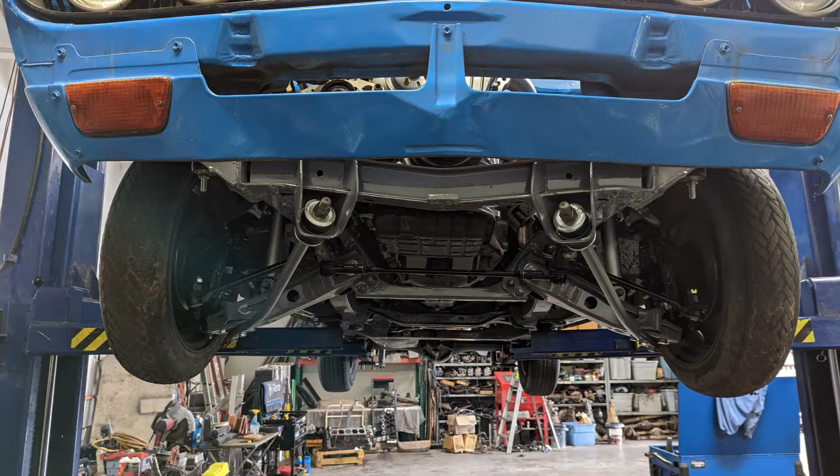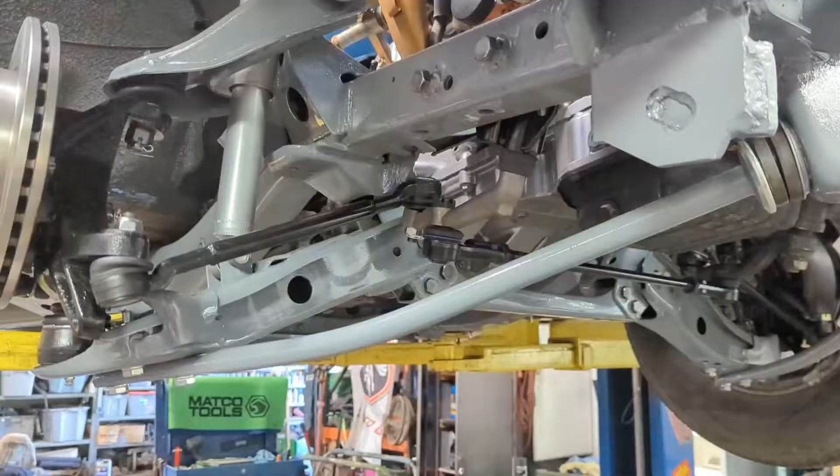This project has not been as straightforward as you might expect, and that has a lot to do with the integration between a 620 and a 720. There are subtle differences. Subtle things can lead to very big complications, especially on a project. In the meantime, let's show off what is right now.

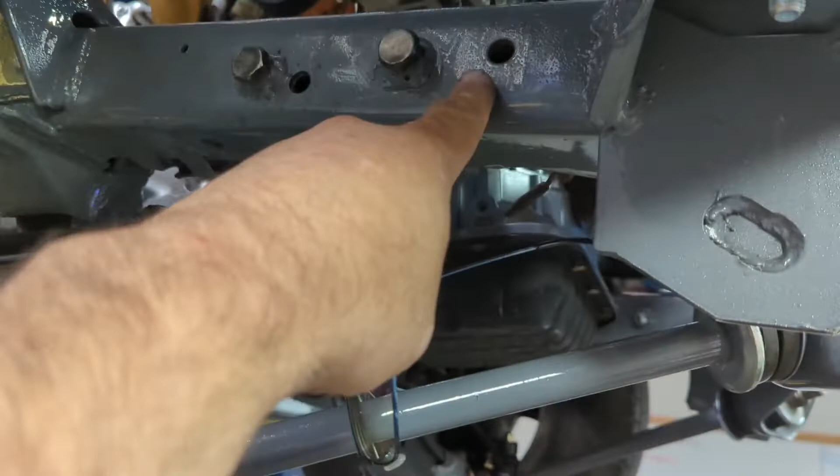And what is right is this gorgeous front suspension that Darren over here has put back together again. So we've got our brake rotors and such, we've got our drop spindles, and then of course this is a 720, but we have 620 steering on here. So you notice where the idler arm used to sit, that's where the idler arm would have bolted. This is where the idler arm now bolts through.

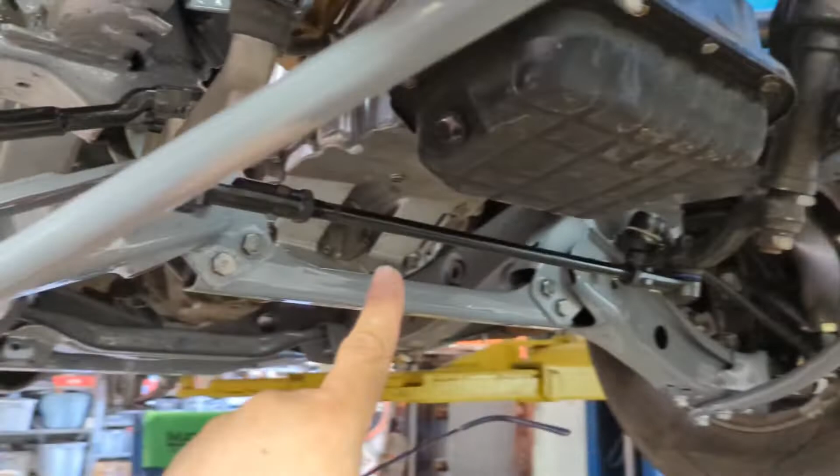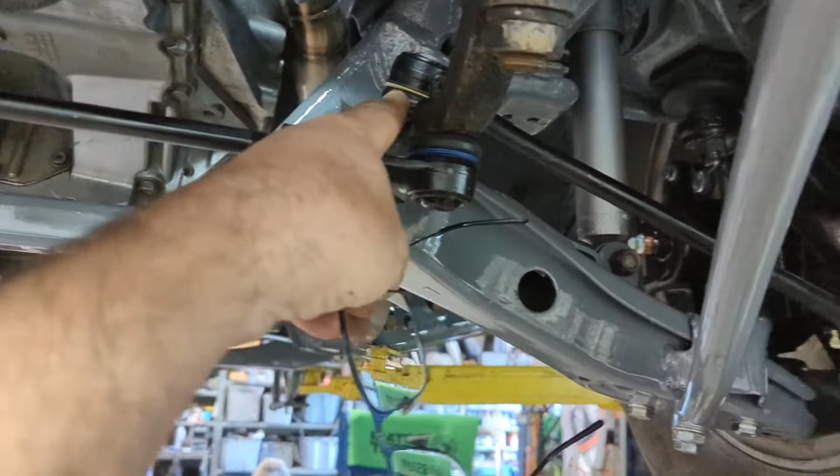So now we got our idler arm. In order to clear the pan, this is rotated onto the bottom side. We used a taper bit and went ahead and got that correct. So now this has got the proper taper on both ends, and that's in, and then the outer tie rod over here, and that's gonna work out beautiful. Also, look at that gorgeous amount of clearance with an SR20 oil pan.

That's pretty freaking awesome. A complication that we're running into is that the torsion bars still need to go in, and Darren over here is going to be working on that. Oh, yeah. So we're going to be re-indexing the torsion bars to get the ride height where we want it.

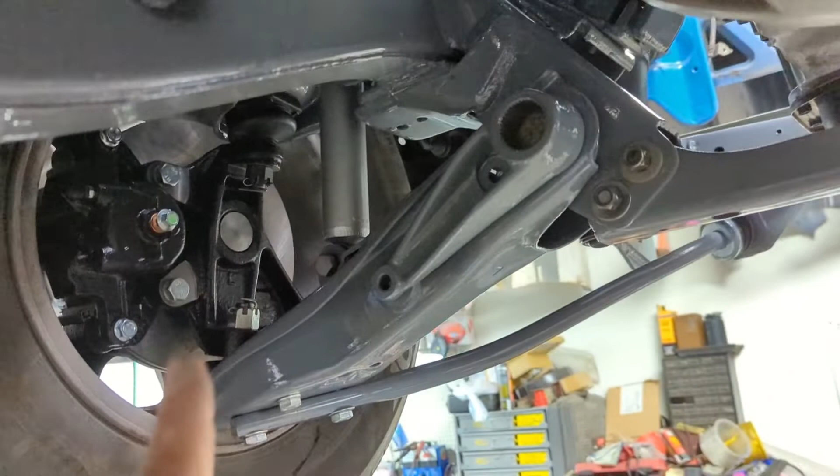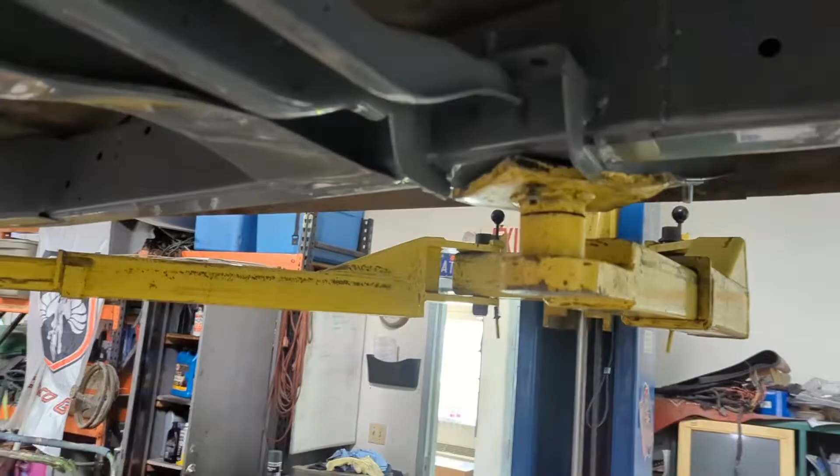But the exhaust for this truck was made up before we got the truck. And this is the stainless steel header that was made, and it actually has a full setup all the way to the back of the truck. Well, I don't have the exhaust with me right now, but there's an interference between this pipe that goes right here, imagine that, and the torsion bar, because the truck had coilovers before on the other frame.

So as usual, one more complication, 25 steps forward, 85 steps backward, but we're working on it. That's what projects mean. Projects take time because you're overcoming challenges. Let's talk about ride height for a second. We've got a lot going on there too.

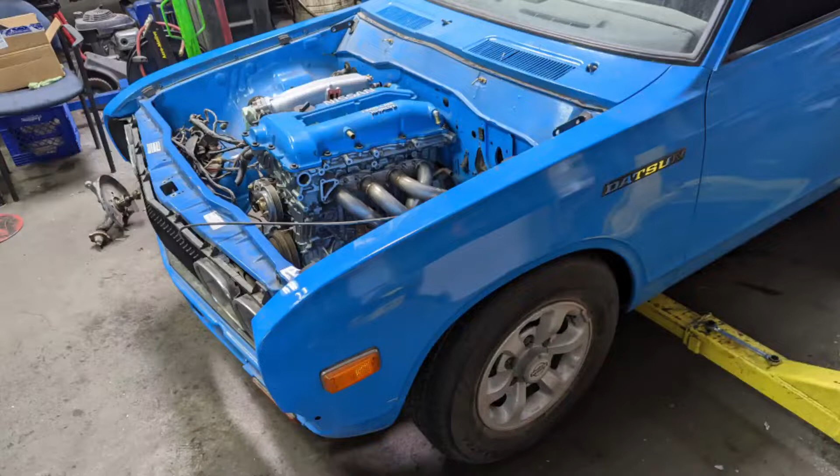Here's a couple of pictures of the ride height, where we want to set it, and we'll let you figure out which one should be which. We'd like it a little lower. The goofed up part about this type of suspension and the fender fitment on these trucks is that the fender comes down and then kind of lips in right there at the wheel. And then this suspension actually widens the track out.

So the problem we're running into is we need a plus 35 offset wheel if it's 7 inches wide. And that is very hard to find. But that's just another war for another day. Luckily, that's not our war to fight. Our customer is handling that one because the wheels are his issue. So he's tracking that down. He's taking care of that.

If you know of a 15 or 16 by 7 wheel with a plus 35 offset with a 6 on 5.5 lug pattern, let us know. Drop it in the comments below, and we will pass that information on to him. He's looking for something like an old school wheel, like a steel wheel that probably could put a dog dish hubcap on or something like that. Nothing too crazy or fancy, but again, we'll entertain anything.

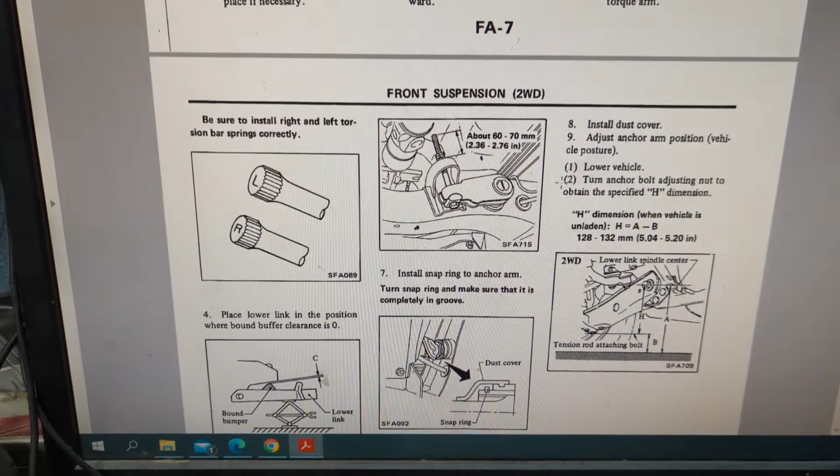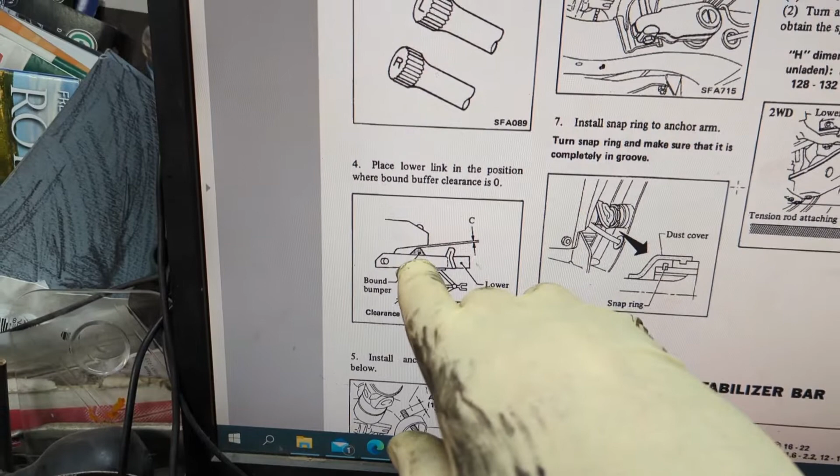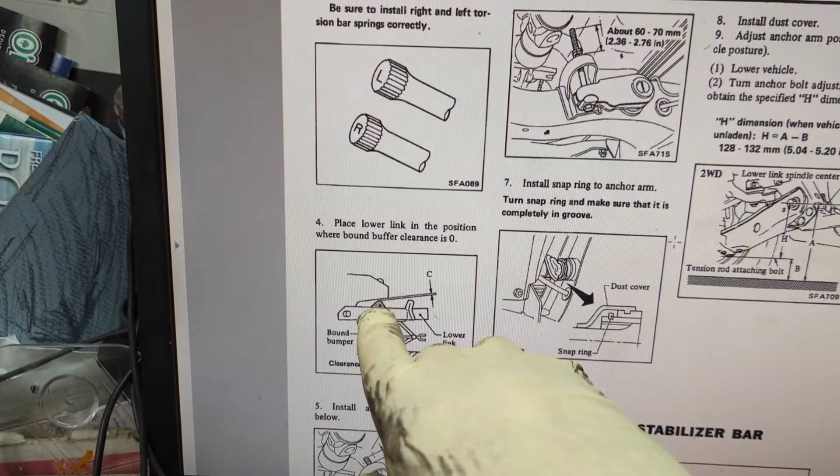All right, so here's the procedure from the factory. There's your installation torques, set the snap ring and dust cover, grease the splines, and then we set the lower control arm so that there is no clearance between the rubber bumper and the arm. Now, since we're lowering this, there is no lower bumper, so we're going to take an inch away. Actually, we're going to take a half an inch away from that. So whatever that bumper height is, we're going to take that away and get this in that position. And then our next step is to get that anchor bolt in position.

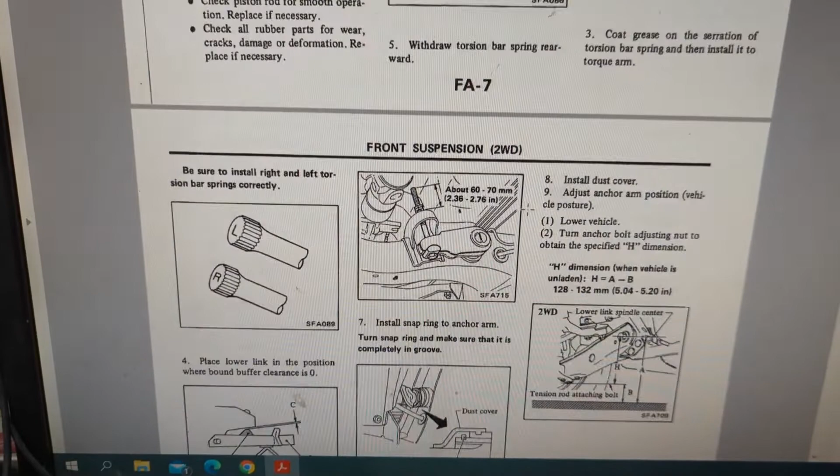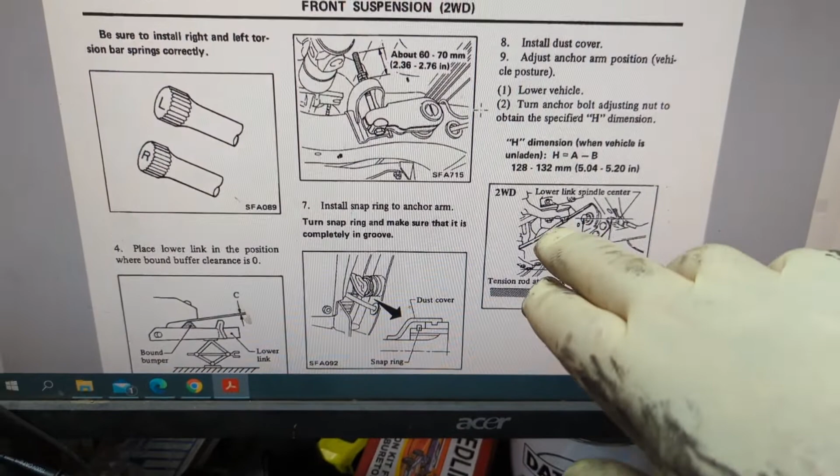So we slide it in so that this bolt protrudes out 60 to 70 millimeters, and then we tighten it down till we get this dimension right here, and then from there we can set the ride height, but we won't worry about setting the ride height until we get everything else dialed in.

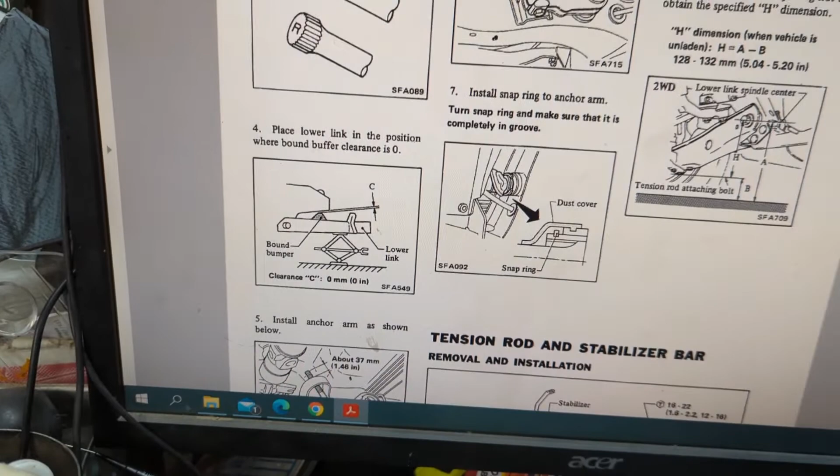But in re-indexing it, notice that its C value right there is at 0. We're going to take a half an inch away from that. A half an inch over here is going to translate into at least a couple inches over here. So that will set us in the right ride height.

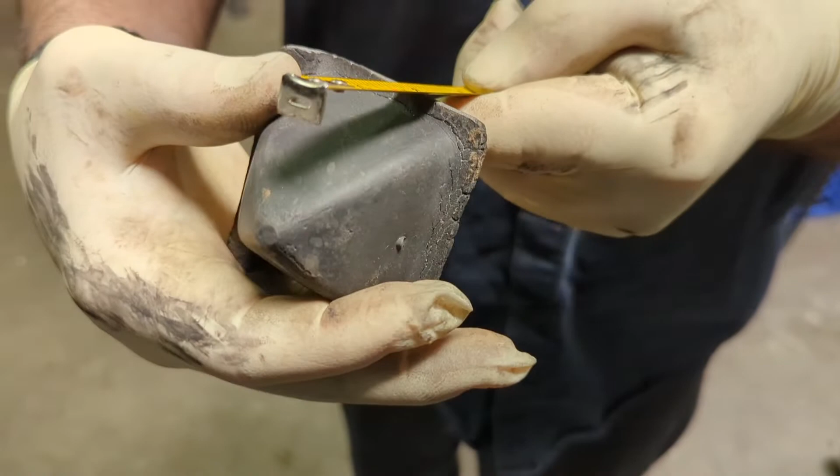So what we're going to do is we're going to measure this height of this bumper, and it's 2 inches. So I want 1.5 inches of clearance over here. So I'm going to take and run this arm up to about 1.5 inches right there, so that the distance between these 2 points is 1.5 inches. That'll get us where we need to be.

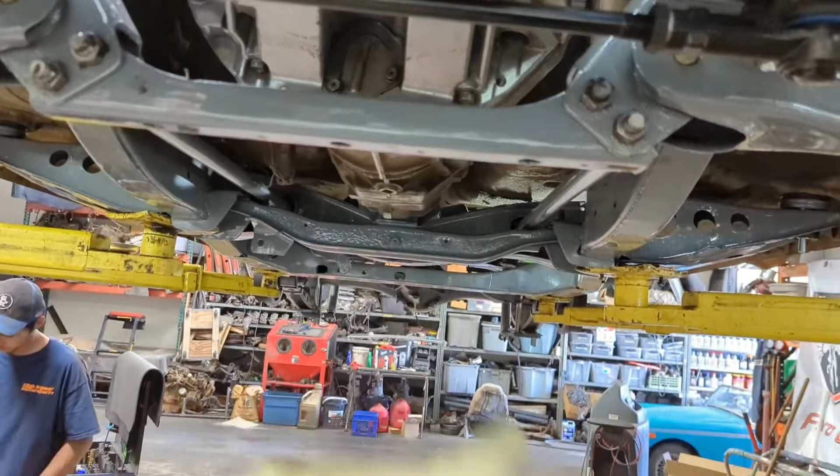All right, so now we've got the distance here set at 1.5 inches on both sides, and now we can go ahead and insert our torsion bars and get that set right. All right, so Darren's going to get that in there. Right here we have our mark, 37 mil. To give it a verify, it's going to probably be about in this section here, which means this guy's going to end up somewhere about there.

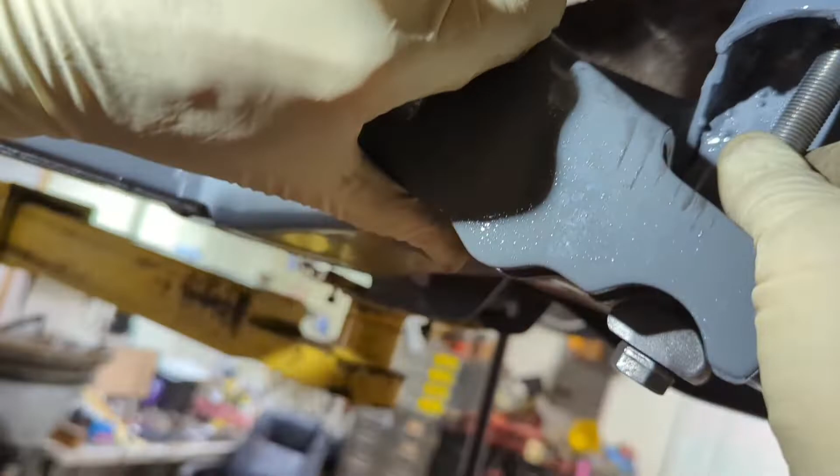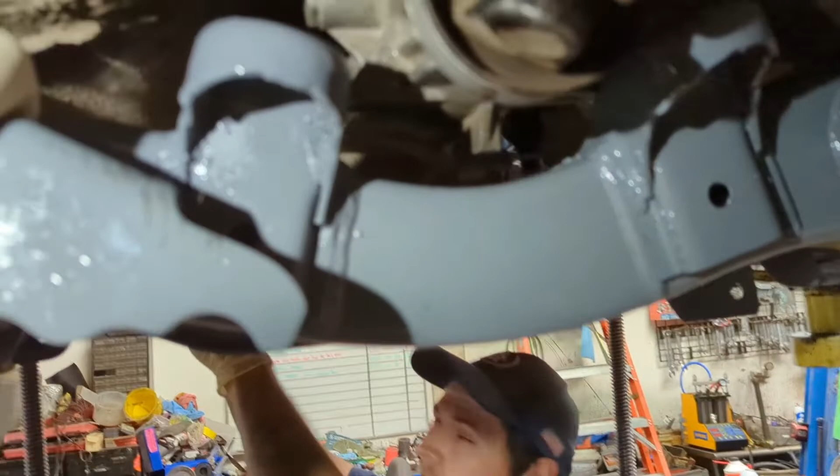See the mark? A little bit more there. Right, there's your mark right there. So we're going to probably end up about right here with the torsion bar. Okay. So, as long as I'm not too... I'm going to hold that right there. Okay. And if you want to just tap that in, I suppose.

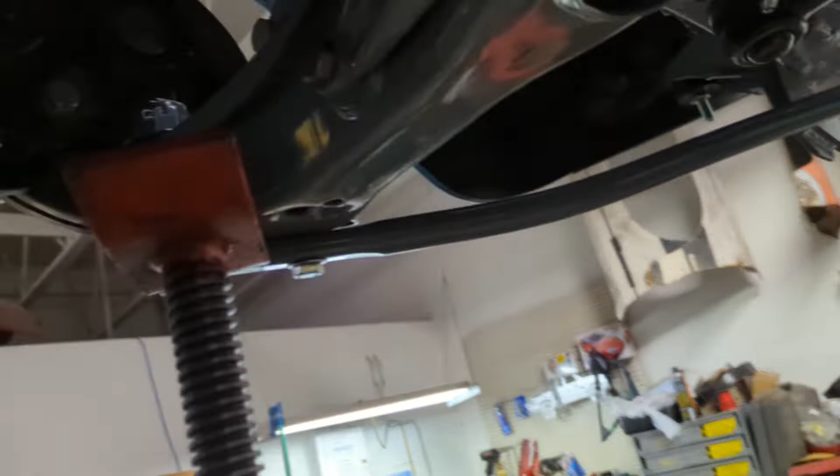Looking pretty good. So one thing to note, when you read the manual, you might want to add grease to the splines. All right, so Darren's going to insert that bolt in. We're going to verify that we're at the right height. We're just a shade over it, but that's fine. I don't know if we could get it a different spline point down.

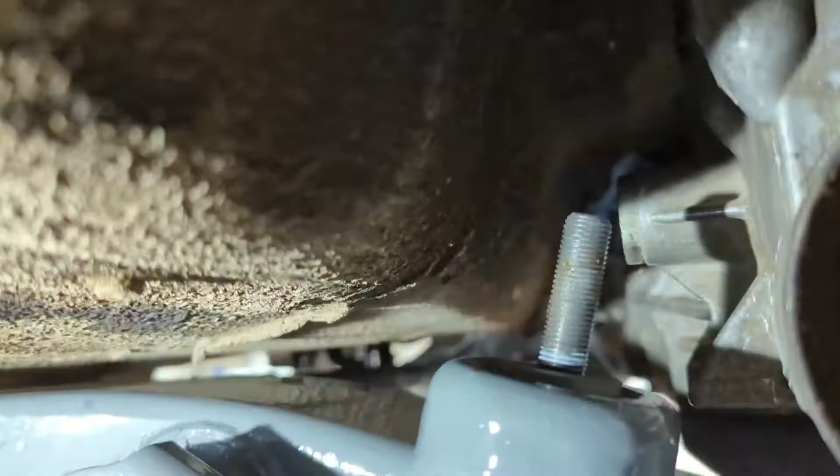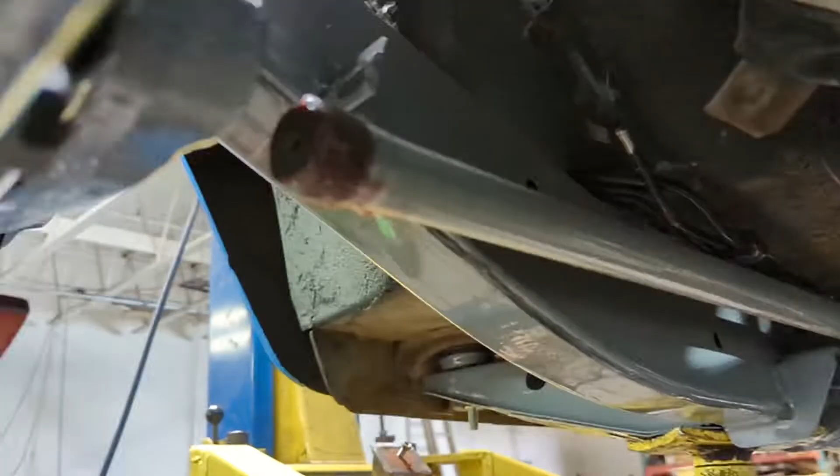All right, so there's our point right there. We've got that bolt protruding through. There's the seat. We're just a couple threads further, but that's fine. We're good. Something to note is put a little grease on your splines. Put a little bit of grease before you insert them, and it'll go together a lot better.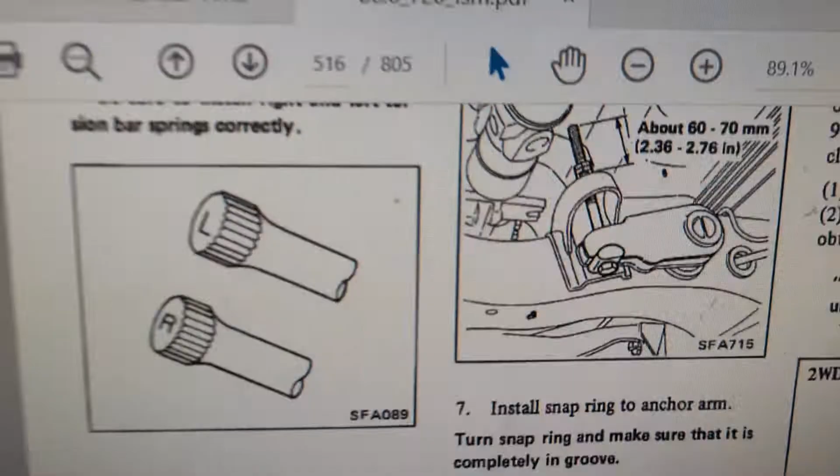All right, so now we've got our preloaded height correct. And so we're going to now tension these. We're going to put some tension on the bars, and we're going to run them up to about 70 millimeters. So from 37, we're going to run them up to about 70 millimeters per the factory service manual. Actually, let me check that spec. So the spec we're looking for is between 60 and 70 millimeters. So we'll probably just take it up to 65, which will get us where we need to be preloaded.

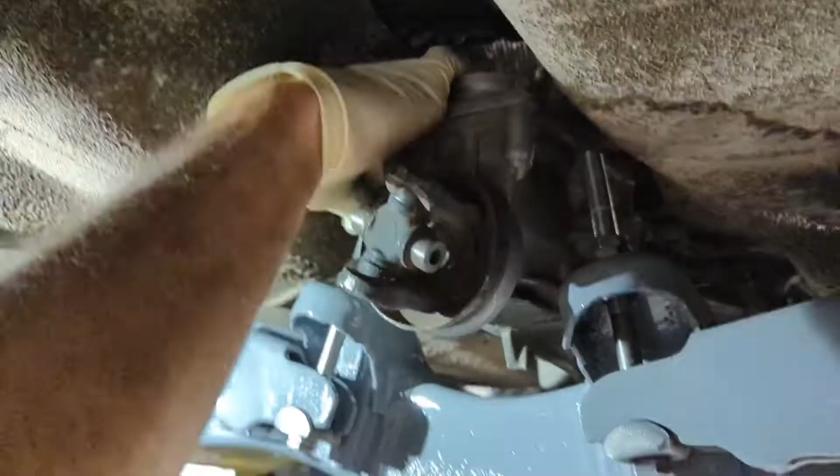All right, so we've got these set to about 68 millimeters now. We don't have a perfect ride height figured out yet, but that's where we're going to be at. The next step is you put the clips in so that your torsion bars don't walk out. So we'll get that done next, and then we'll probably drop her on the floor and see what she looks like. All right, so we're lowering this thing down onto the ground, onto its own wheels and weight.

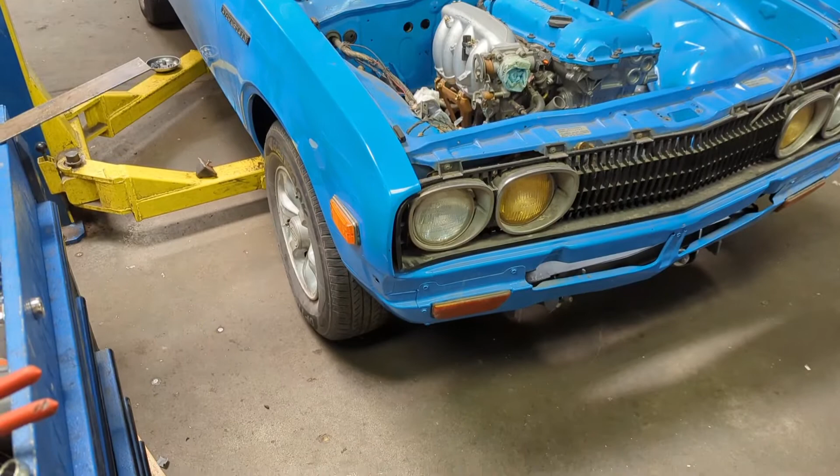And yeah, that's pretty low compared to what it was. It's not quite at ride height yet. But let's get it parked over in the corner and get a side shot. I do think we're gonna make some adjustments to the rear suspension, try and get it down a little bit lower, and we might have to play around with how we're going spring-wise on it, because I do not like how that's sitting exactly the way it is. I'm okay with the height, I'm just not okay with the number of blocks and the way they sit and all that, so we're gonna play with that a little bit.

We'll check that out. Hope you enjoyed watching us re-indexing torsion bars.